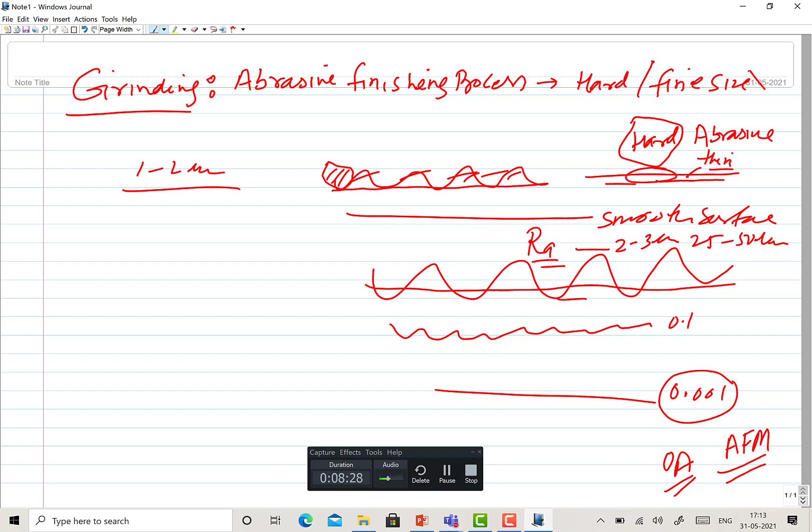So for most functional applications, we need different ranges of surface roughness. For most common cases, maybe 1 to 2 micrometer roughness is fine for most functionalities, but for critical applications you may need it up to 0.1. For further critical and higher applications, you may need 0.01 micrometer, right? So these need to be realized.

Because simple manufacturing processes like casting, welding, machining or forming will be giving you higher levels of roughness. You can get the desired size, you can get the desired shape, but not exactly the finish you want in one go through these processes. Also, not very controlled dimensions through these processes. So if you don't have very close control over the dimensions, if you have not realized a very good surface finish, then you need a secondary processing, you need further processing.

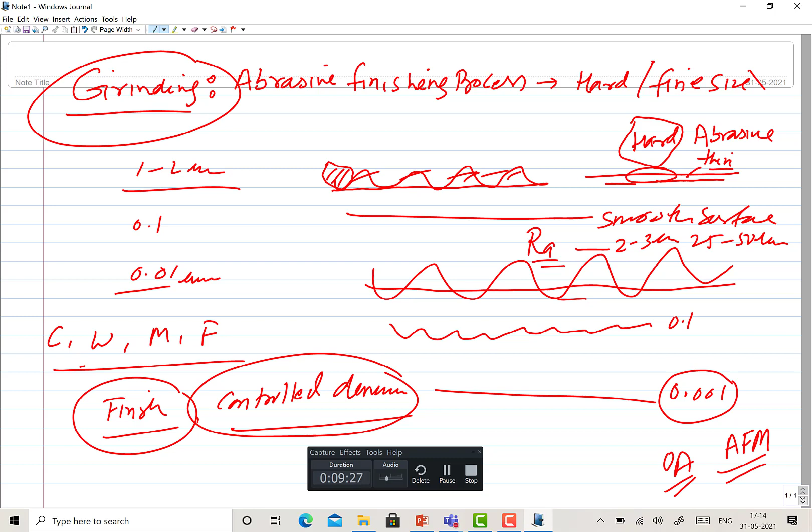So that comes in form of grinding. So primarily the grinding helps in two ways.

This is like realizing the desired surface finish.

The second aspect is realizing the desired control over dimensions. Earlier you had a variation of plus minus 0.1 - this may not be good enough for a given application. If you want a control of plus minus 0.001, you need some other process. Grinding may be able to help realize this, but simple machining may only give you say 10 plus minus 0.1. So close control over dimensions can be realized through grinding, and the desired surface finish can be realized too.

A common application you might have experienced: steel that is very polished, smooth finished. You can use that as a mirror - you can see your face on the surface of the metal because of the very high reflection realized when the surface finish is extremely good.

Okay, so now I'll show you - here if you see sand casting, the kind of tolerance, the variation in dimensions realized through casting, it is in this range.

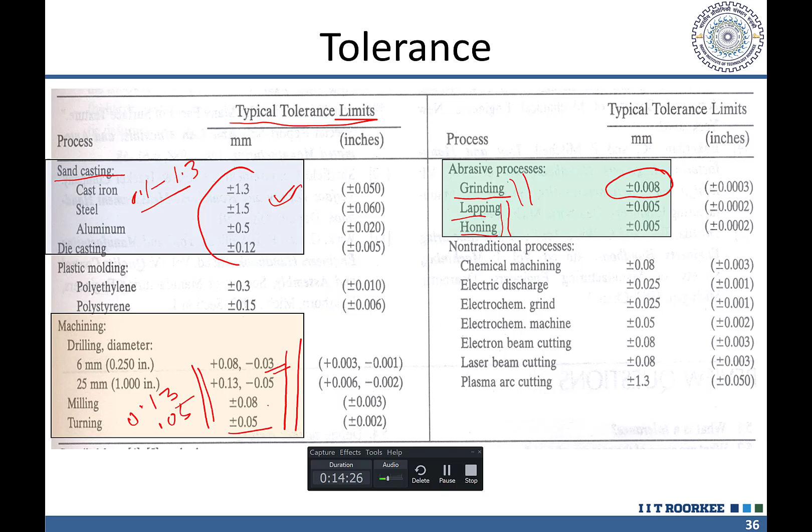Lapping and honing - you must have seen people use this for cleaning or smoothing the floor. That is the kind of lapping process where there is a fluid, abrasive, and some grinding wheel or abrasive wheel continuously rubbing in the slurry. So there is a slurry and an abrasive tool running on the floor, just to smoothen and achieve good smoothness. That is one similar example - lapping is mostly used in case of metals.

Unconventional or non-traditional processes offer a higher tolerance value.

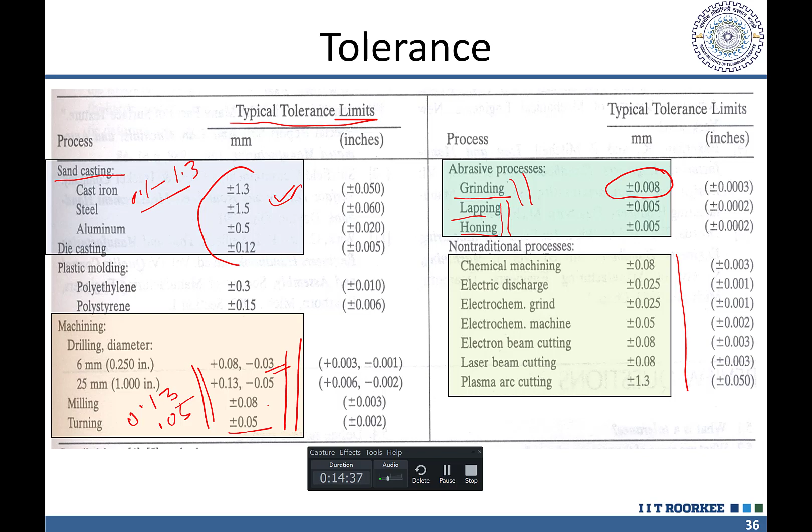Now look at the surface roughness - for casting it is high. For die casting it is reasonably good, like 1 to 2 micrometer, but for sand casting it is very high - you can see 12 to 25, even furthermore, it can be even 50 in some cases.

In metal forming, again it is high. Hot rolling results in very poor roughness - why? Because surface oxides are formed at the surface, and the surface is extremely soft, leading to a lot of indents, depressions, ups and downs, etc.

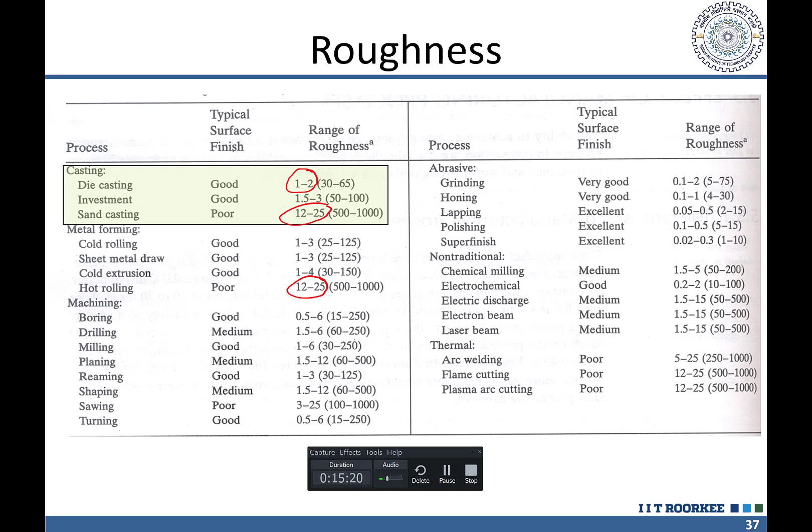But in the cold condition it is reasonably good, not that great, but reasonably good, like 1 to 4 micrometer. For machining though, it is finer, not extremely fine, like 1 to 0.5 to say 4 or 5 micrometer, depending upon the process being used. But for grinding, the surface roughness, you see, is extremely good.

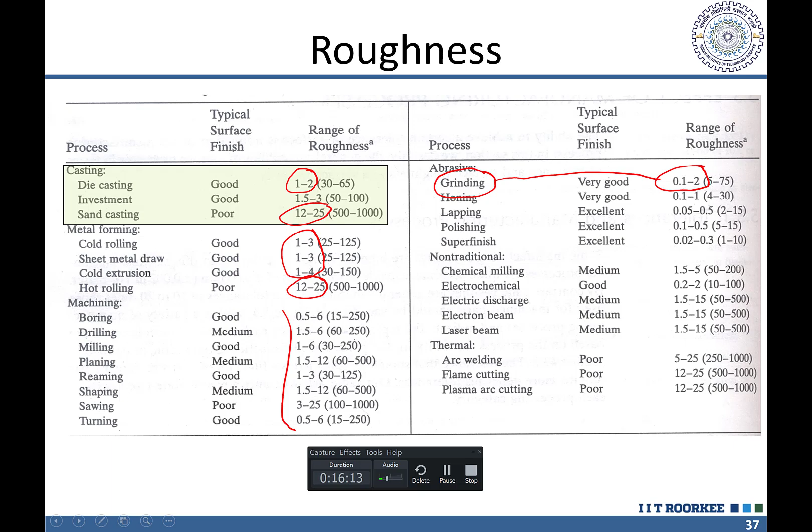Even further, even lower surface roughness can be realized if we control the depth of cut and the surface finish, and use proper abrasives of the desired size for grinding purpose, then we can realize further finer surface finishes. So these are the two things justifying where grinding should be used.

Okay, close control over the dimensions and achieving the desired surface finish, where grinding will be suitable. So the common purpose for which grinding is used - as I said, the abrasive in grinding is a key factor. For removing material, you must have seen so far in machining that the tool must be harder than the workpiece in order to indent and then subsequently remove the material.

So what are the typical characteristics of the abrasive? It must be harder - hardness of a typical abrasive, say aluminum oxide, is maybe 1800 to 2000 HV. Then SiC around 2000 to 2200 HV, Vickers hardness. This is CBN, cubic boron nitride, maybe 3000 to 3500 HV. Then further greater than 4000 to 5000 HV for diamond - PCD, polycrystalline diamond, which is used for machining purposes.

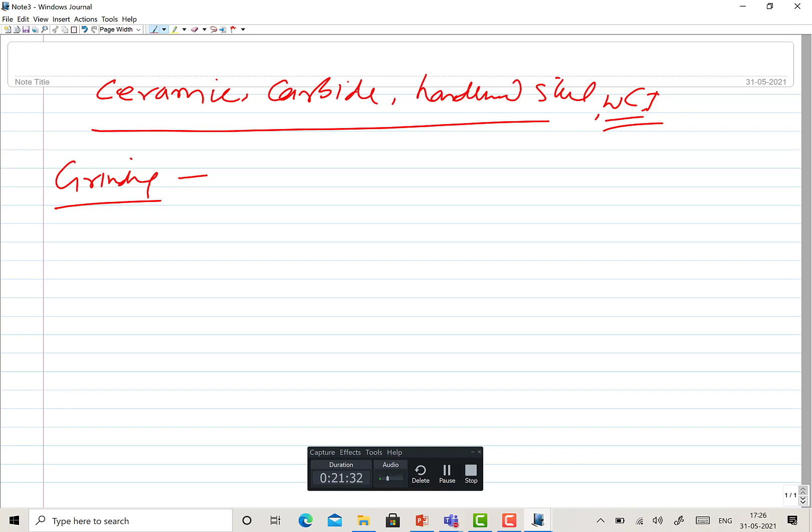So what you need is a grinder. Grinding helps to get the desired size, shape, finish of these hardened or difficult-to-cut materials. So not just the finishing and close control over dimensions is realized with the help of grinding, but it is also used for shaping purposes or for cutting purposes, especially when you find that it is not doable by conventional methods.

You cannot cut using the conventional method. So ceramics, carbides, hardened steels - these can be processed, can be cut using grinding wheels. So hard and brittle materials - ceramics, hardened steels, cast irons - these are the kind of materials which are preferred to be processed by grinding.

Now, other materials - there may be the purpose of grinding just to give the desired surface finish and desired control over the dimensions, meaning controlling the tolerance. In those cases, irrespective of the material, we can choose the suitable grinding wheel and apply grinding to get the desired finish and control over dimensions. But shaping and cutting is primarily applied in cases where material is extremely hard and difficult to process using other routes.

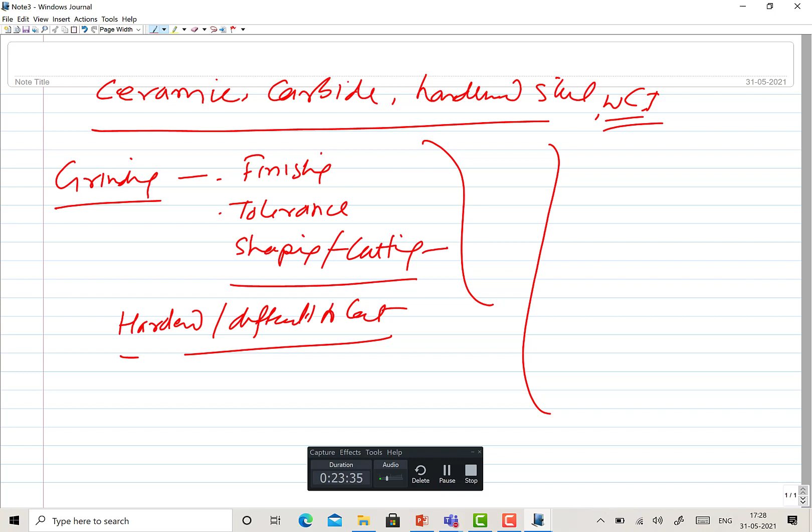So hard and difficult-to-cut materials can also be processed using grinding. Now coming to the typical, most common applications of grinding - it is used for finishing crankshafts, which are used in automobiles.

And automobiles also use lots of gears, so finishing of the gears. These are just two extremely common examples of grinding. Now grinding can also be used if, say, you have produced something and it has some irregularities, you have deposited a weld bead and it is rough, so you can use the handheld grinder. That's called rough grinding. So a handheld grinder can simply be used to remove all that unwanted material very easily without putting the entire workpiece

on the machine for machining, because sometimes hardened materials are not that easy to process through conventional machining, so they are simply removed through grinding. So in that way we can call it rough or fine grinding. Rough grinding is used just like a handheld grinder is rubbed against the surface of the component which is to be smoothened, and fine grinding is certainly performed using robust, heavy, sturdy machines. Okay, so this is about the typical applications.

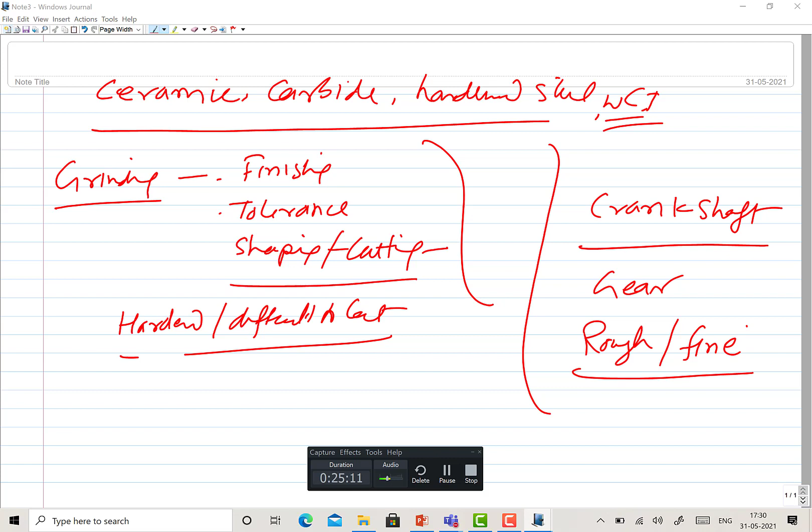Now how it is realized, I have got a few diagrams also, I'll show that. But before showing that, let me talk a little bit about abrasive finishing or abrasive machining, where abrasives can be held in different forms. Abrasive is the key actually. These abrasives can be fitted or bonded in the form of a belt or emery paper. In emery paper you must have seen alumina, Al2O3, or silicon carbide based emery papers, and emery is basically alumina based. For simple rubbing, removing rust and smoothening the surfaces, emery papers are used, where abrasives are bonded on the surface of the paper, right?

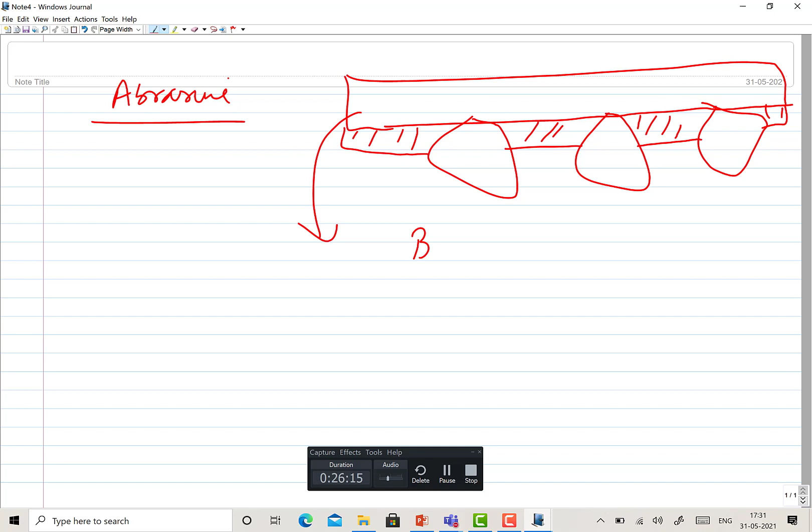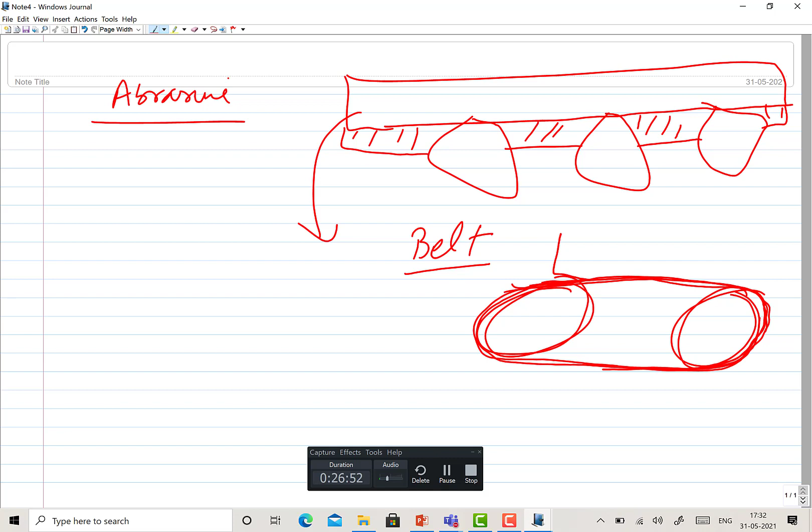Similarly, these can also be bonded in the form of papers, which can be rolled and shaped in the form of a belt. So you have rollers like this, and between these two rollers you put the emery paper or the belt on which the abrasives have been bonded. With emery paper, you take it and rub against the surface manually. Here the rollers, over which the belt fitted with the abrasives is fitted, are moved. So by hand we press the workpiece over this belt, and these fine abrasives will be rubbing the workpiece.

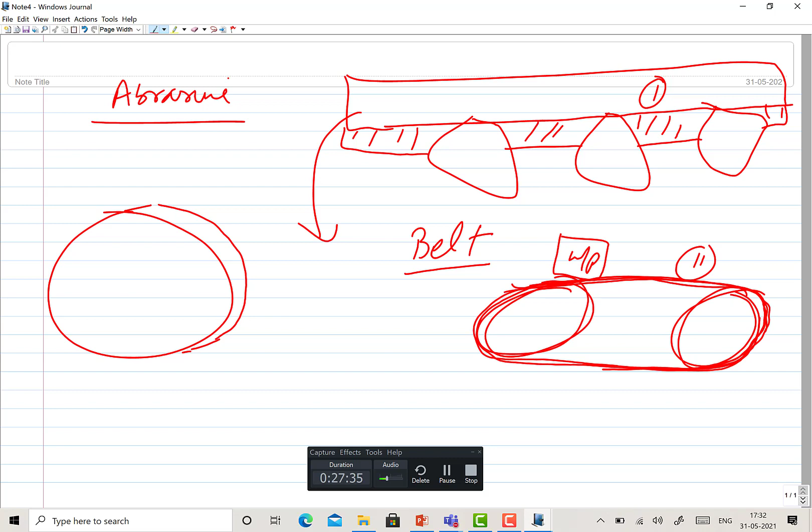So how will these be rubbing and removing the material? So these are the two forms. This is the first form, where abrasives are bonded and applied on the paper, and this is the second, where they are applied in the form of a belt. And the third, which is most common, is abrasives bonded in the form of a wheel. So the entire wheel is made of two things: one is the bonding material, and the other is the abrasive material.

The bonding material may be rubber, it may be metal, or it may be vitrified bonds. There are different types of bonds basically. So the bonding material and the abrasives are both mixed, and then they are compacted and shaped in the form of a wheel. The wheels also can be of different shapes, depending upon the shape of the component. I'll show you the different shapes of grinding wheels. So depending upon the shape of the workpiece, we can use different shapes of grinding wheel. So the abrasive and the bond are both mixed, and then they are compacted to give the desired shape.

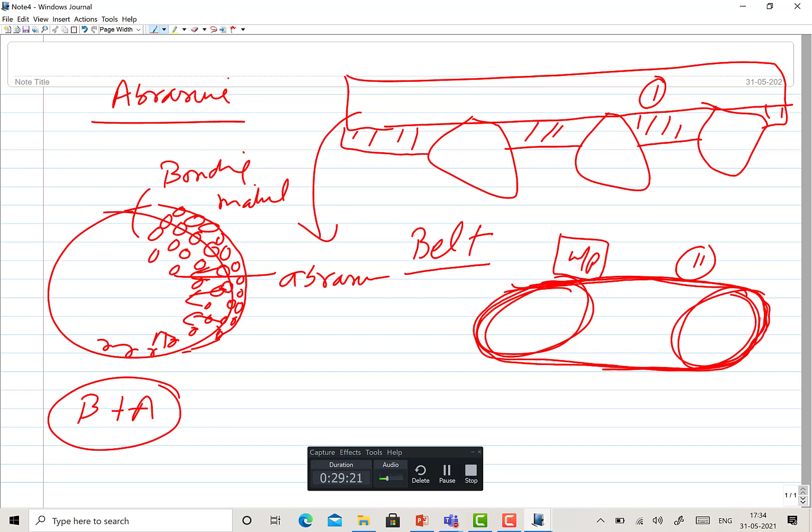When this shape is given, you will notice that abrasives are spread and distributed everywhere in the wheel. Some of these will be projecting from the surface of the wheel like this. The abrasives are present not just at the surface but in the inside zone also, fitted in the bonding material. So obviously during grinding, some of these abrasives will be damaged and removed. Bonding material will also be damaged and removed. The abrasives getting damaged means they will wear out gradually, so their shape will keep changing, and when they wear out completely, the cuttability or grindability of the abrasive particles will decrease.

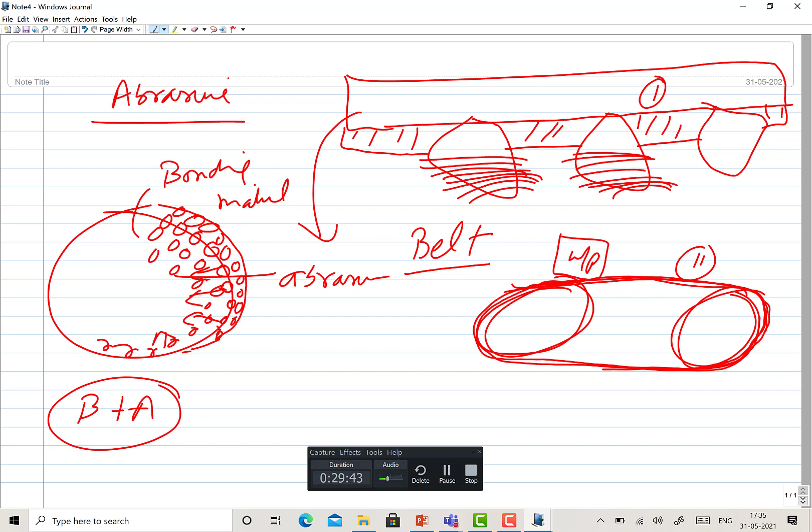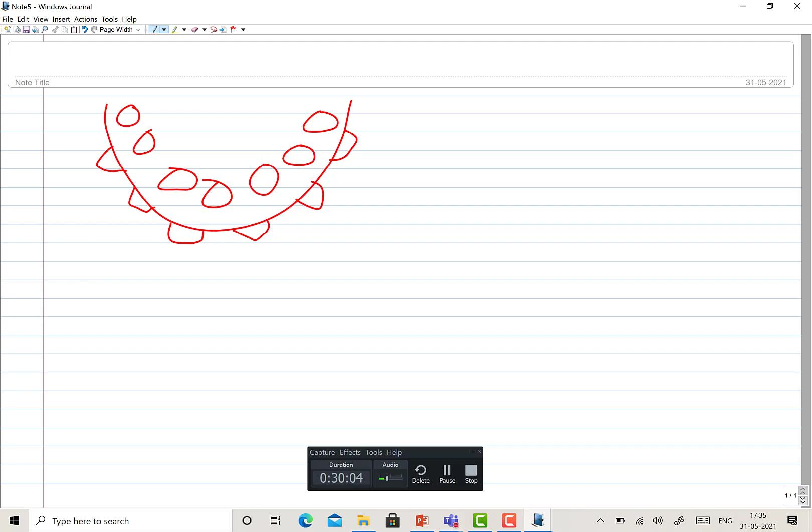So let me show you another one. Let's say this is the surface of the grinding wheel, and these are the grinding abrasives projecting from the surface. There will be a number of abrasives inside the wheel, and some of these are projected. When you continue the grinding for a while, these will wear out gradually. So eventually you will have a situation where the abrasives are not actually projecting from the surface.

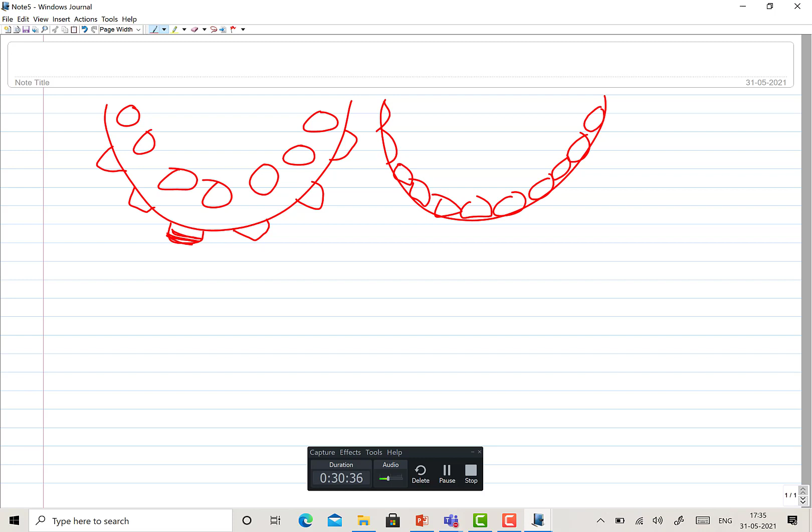So the cuttability or grindability of the grinding wheel will be reduced significantly, because you don't have the teeth to cut the material now. This you can call attrition. Attrition is nothing but a gradual wear.

So what is the reason behind the gradual wear? About that probably we'll talk a little later, but it is important to see that when the hard abrasives are interacting with the workpiece materials, the abrasives themselves will be wearing out gradually, and they will be losing their dimensions; their shape will be changed, their size will be changed, and eventually you will find that no abrasive is projecting beyond the surface of the wheel. So their grindability will be reduced.

That's one thing only. Okay, so let me say something about how the cutting happens. Say this is the surface and this is the grinding wheel, like this. So you are pressing the wheel on the surface, or moving the workpiece in the upward direction. So there is an in-feed kind of thing which is facilitating the interaction of the abrasive and the workpiece.

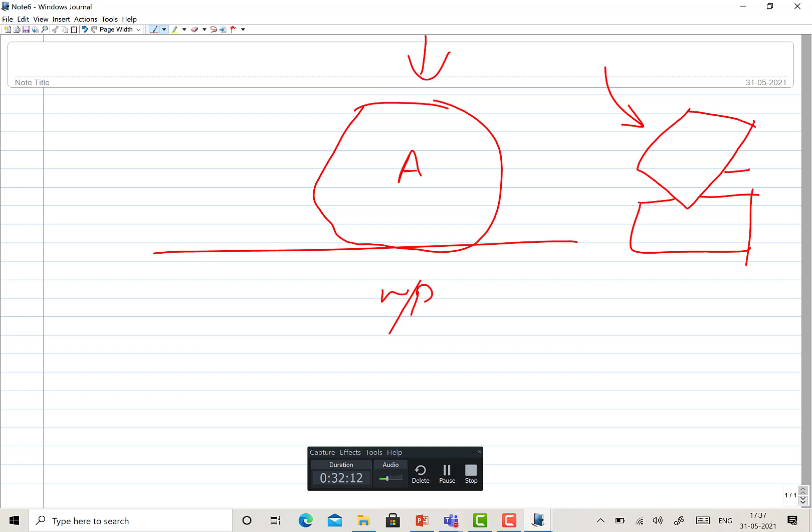Initially it is expected that the abrasive like this will indent the workpiece, like this. And then when this indent is coming down and moving and interacting with the workpiece, say it is moving in this direction, it will be causing some kind of deformation here. So when this deformation exceeds a certain limit, this material gets sheared off.

So if you see the kind of movement which exists: the wheel abrasive is moving in this direction, the workpiece is, say, fixed. So material from this zone will be removed by simply shearing action. But there is a possibility that the other abrasives which are not that sharp, or the bonding material which is not performing any cutting, will also be rubbing the surface of the workpiece.

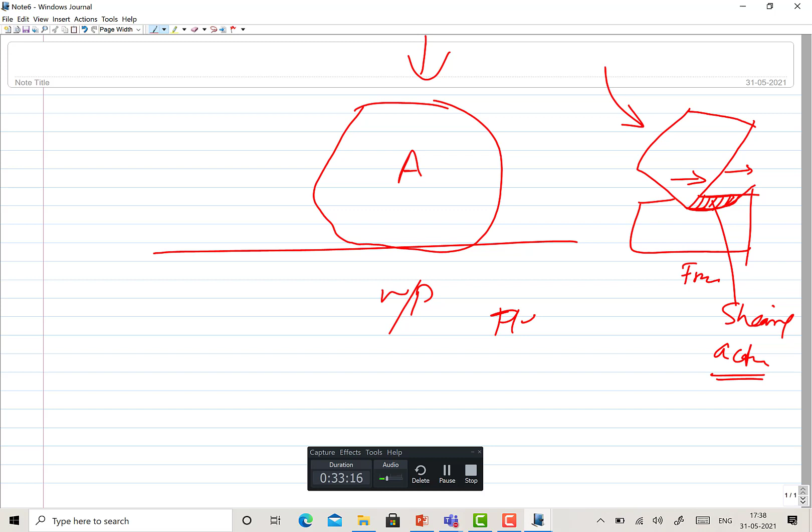So whatever mechanical energy is being used for the grinding process, a part of that will be converted into heat. So basically the first thing is the material is getting removed through shearing. And the blunted abrasives as well as the bonding material will also be rubbing the surface of the workpiece, causing friction.

So these are the two things: removal of the material from the surface of the workpiece by the fine abrasives in the form of very thin chips, or a thin layer of material getting removed by the shearing action, that is one; and the rubbing between the workpiece and the blunted abrasives and the bonding material, causing friction. So the shearing and the friction, these two are responsible for generation of a significant amount of heat.

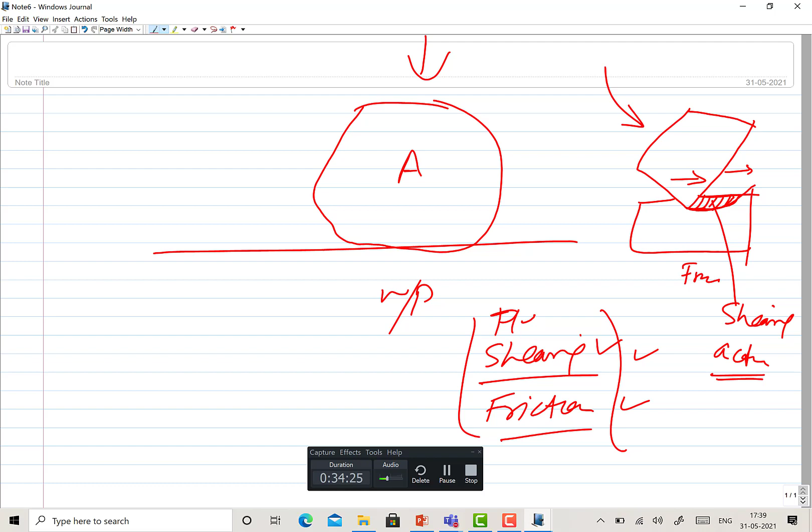So whenever grinding is performed at extremely high speed, say this is a wheel rotating at 2000 to 3000 rpm, revolutions per minute, it is interacting with the workpiece where the abrasives are fitted here and there. Some of these abrasives are removing the material in the form of fine chips, while others are simply rubbing. So this will be causing a significant rise in temperature, causing heat generation.

So heat generation is happening due to shearing, because whenever mechanical energy is applied, a part of the energy will be converted into heat, and then frictional heating. So these are the two main things. The rise in temperature is so fast, say within 10 to 20 milliseconds, it will be rising like this. Temperature will be going to maybe 300, 400, depending upon the metal being processed, the amount of friction and the kind of shearing taking place.

So with a fresh grinding wheel, frictional effects will be less, and maybe the temperature rise will be less, but if the wheel has been used for long, there will be a lot of frictional heat generation that will be causing a significant rise in temperature.

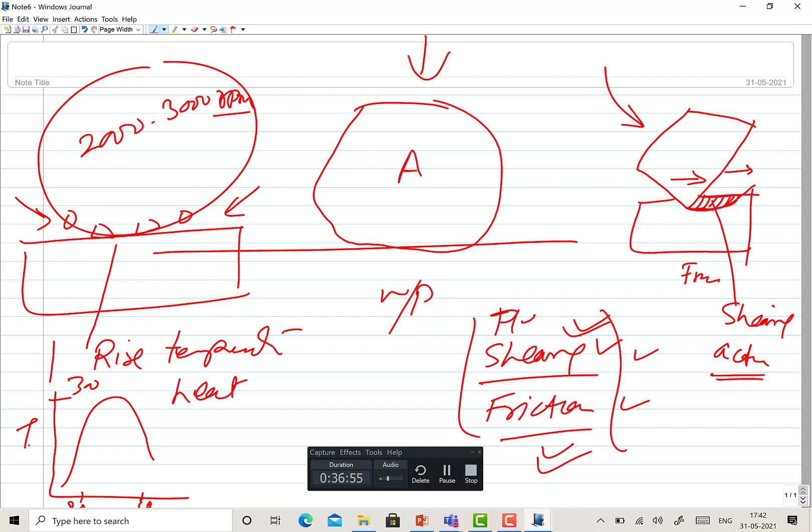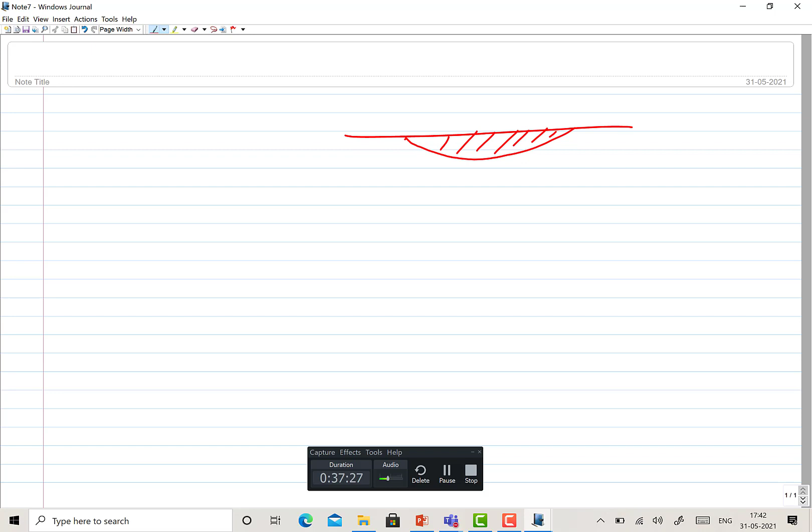This is one thing. Let's say this is the surface, and this is the zone from where material has been removed. When the material is removed by the shearing action, you will always see that the deformation has exceeded the fracture limit, where the ultimate shear stress level has been crossed. That's why the shearing has happened. But below that, this region would have been subjected to first elastic deformation, then plastic deformation, and then subsequently removal through the shearing.

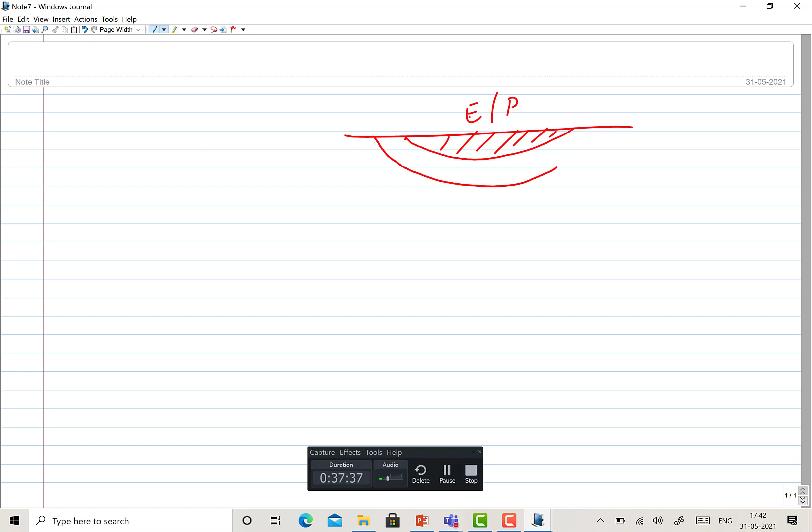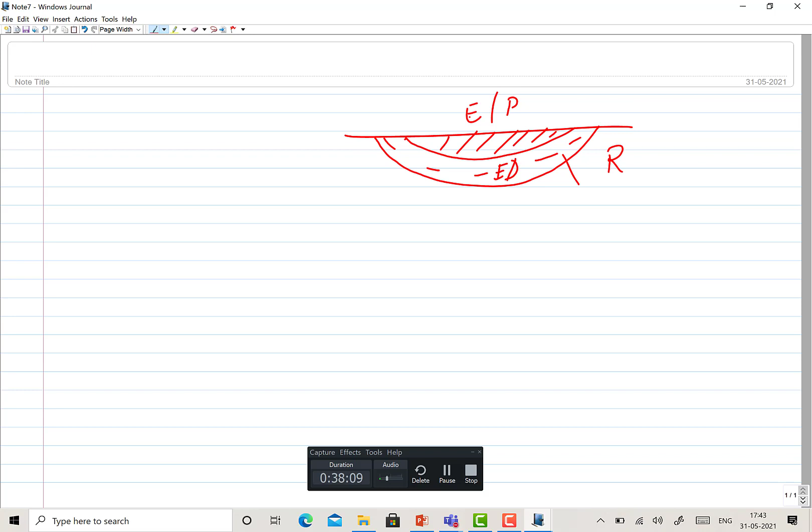But there will be a region below that which will be under elastic deformation only. The surface layer has been removed, and below that you had the elastically deformed zone, so that will try to shrink because it has been elongated in the process of grinding. These efforts to shrink will lead to the development of residual tensile stresses, meaning the surface will tend to shrink.

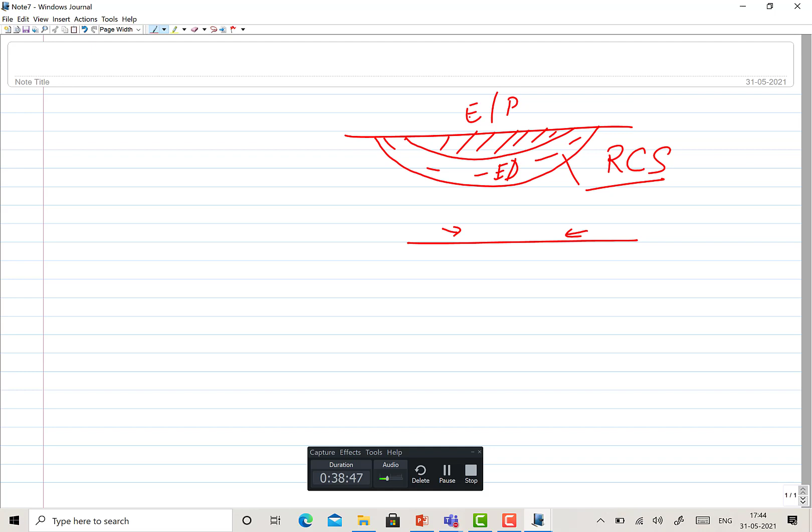The presence of the elastically deformed layer is contributing towards the development of the residual compressive stresses. These compressive stresses are there even when there are no external tensile stresses, no external load. So this is one aspect. The second is a rise in temperature.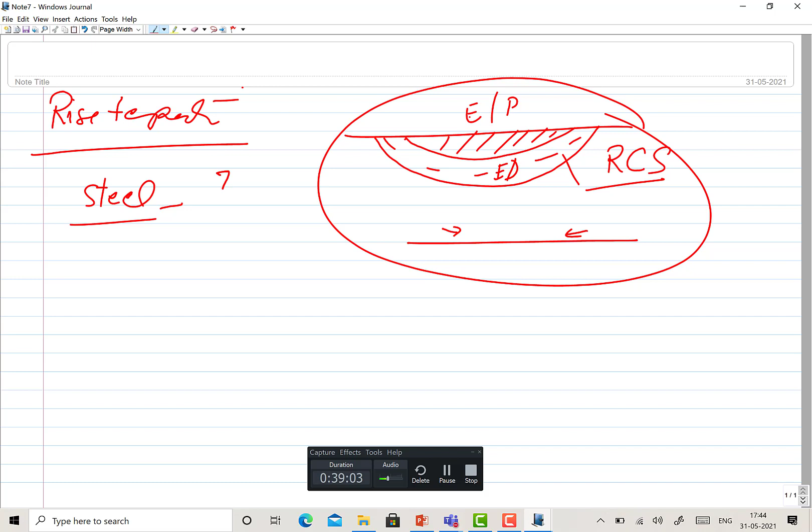As I said, in certain metals the rise in temperature is too high. Say you are working with steel, and your temperature is going beyond 700 or 800 degrees centigrade, the steel gets transformed into austenite, and due to the rapid cooling it forms the hard and brittle martensite. Formation of hard and brittle martensite at the surface sometimes promotes cracking and formation of hard and brittle layers.

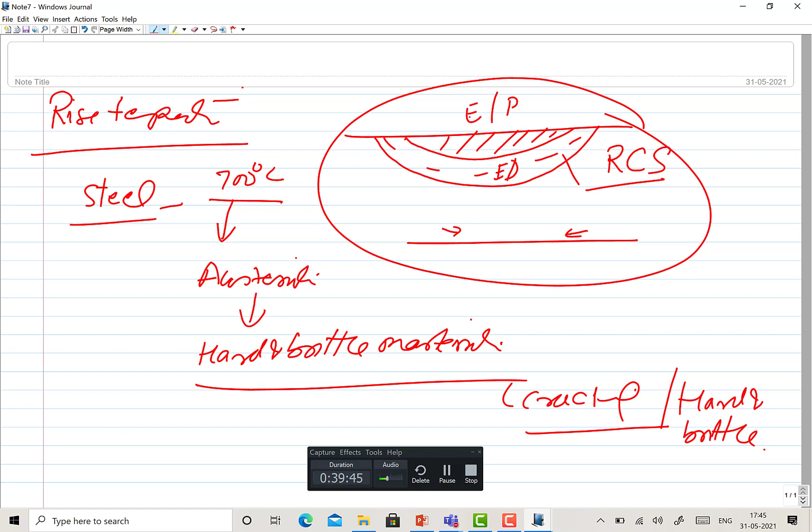So excessive heating of steel is undesirable. Maybe it is undesirable in most cases, but this is a typical example of steel, where if it is heated more than say 700 or 730 degrees centigrade, it leads to austenitization, and subsequently rapid cooling leads to martensite formation, which in turn promotes cracking and embrittlement. Similarly, in quenched and tempered steel, heating causes over tempering, leading to softening of the surface. So there is always alteration in properties due to overheating.

Earlier you had one set of properties before grinding, and after grinding you find that its properties have been modified. Its hardness has increased or it has softened. Over tempering leads to softening, and martensitic transformation leads to embrittlement. It depends on the condition of the steel. If the steel is in quenched and tempered condition, it will lead to softening, and if it is plain carbon steel in normalized or annealed condition,

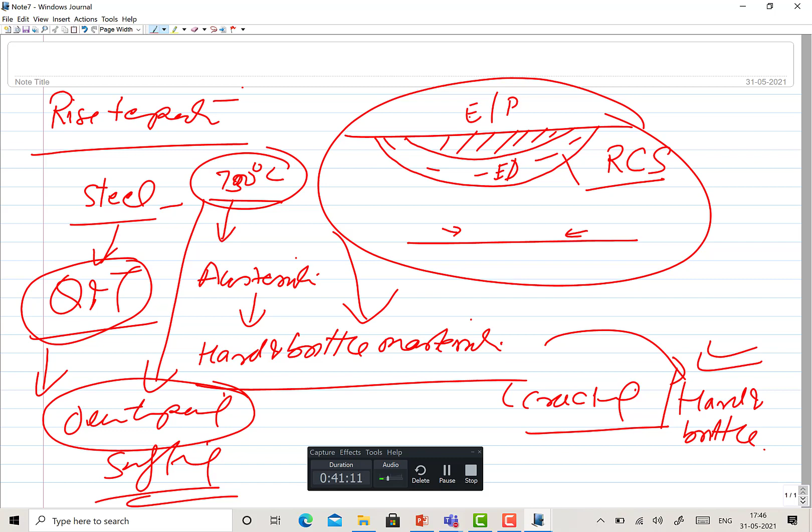then it will lead to hardening and embrittlement. So a rise in temperature is not good in any case, and that's why we need cooling. We need to control the temperature, and that's why very frequently during grinding we use coolants. Now let me show you a few.

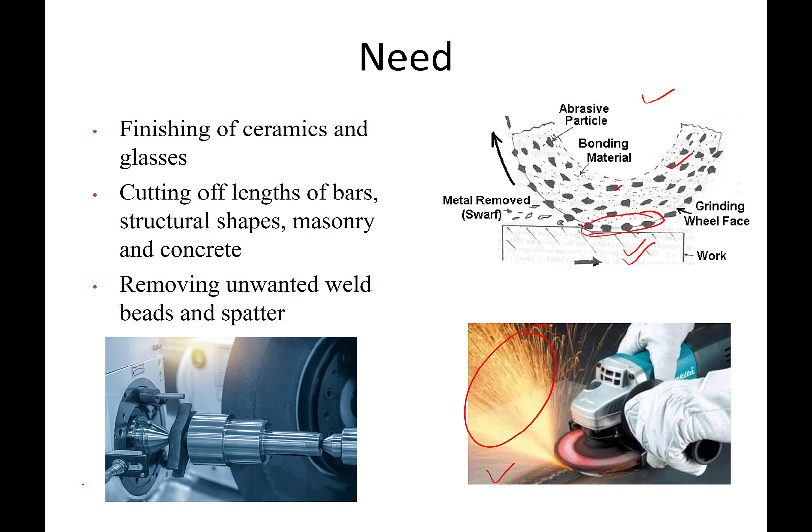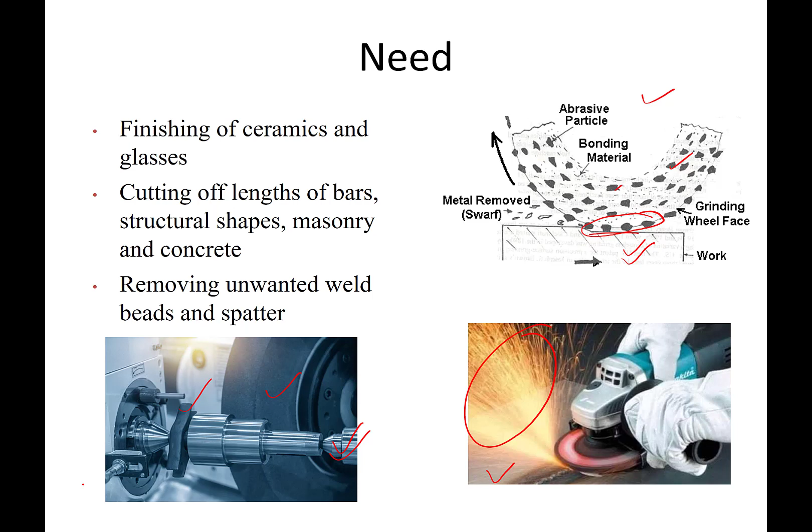This is what I was talking about as far as the approach of the grinding is concerned. These abrasives will be interacting. Let's say this is the direction of the grinding wheel rotation, and this is the abrasive which is interacting. When it interacts, you will always find that this is the zone from where material has been removed, and this is the chip which is being removed.

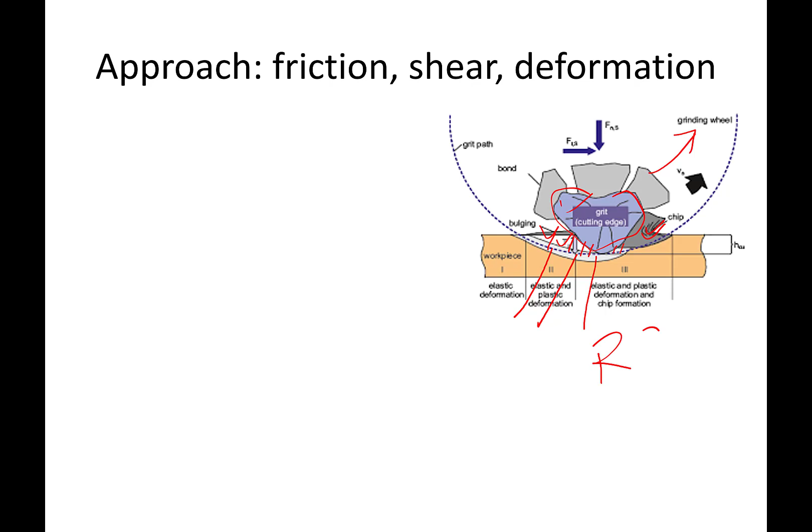So here you see, this is the zone which would have been subjected first to elastic deformation, then plastic deformation, and then finally shearing off. But below that there is a zone which will be under elastic deformation. This zone of elastic deformation in turn causes residual compressive stresses. These are good for the tensile strength and the fatigue behavior of the material.

As far as the heat generation is concerned, I talked about two things primarily. One is shearing, where a lot of effort is needed to remove the material from the workpiece by the abrasives, so it consumes a lot of energy, and part of that energy is converted into heat. The rest is friction, like rake friction or flank friction.

So say this is the abrasive; this you may term the flank part of the abrasive or the rake part of the abrasive, if the abrasive is moving in this direction. So there may be friction between the rake face and the workpiece, the flank face, and the chips. So basically friction and shearing are the two main causes behind the rise in temperature, and the rise in temperature is extremely fast, and it depends again on the kind of abrasives being used.

CBN, cubic boron nitride, because of its good conductivity, leads to a somewhat lesser rise in temperature as compared to alumina. Alumina has lower thermal conductivity. And you can see the effect of depth of cut, although it is in micrometers, not in mm like what you have seen earlier, half mm or 1 mm depth of cut.

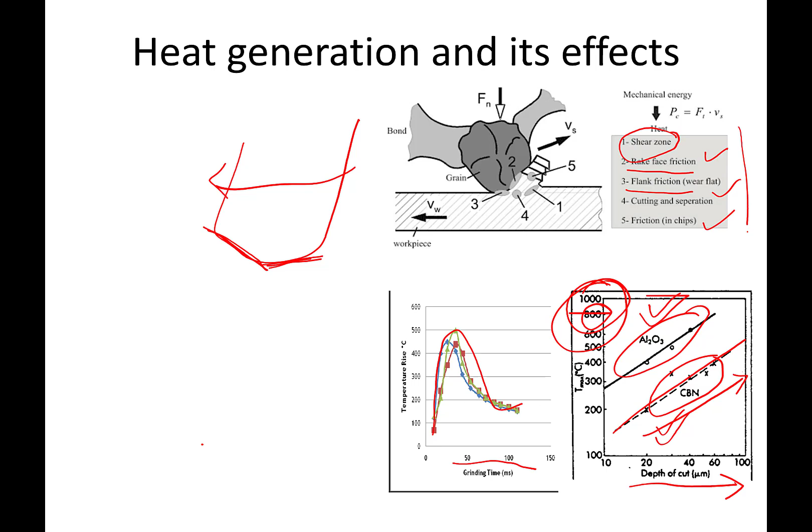In the front view, say this is the wheel, and this is the workpiece. The wheel is rotating, and this is the workpiece. So if you see here, when the wheel rotates, the surface will be interacting with the workpiece here. So you have to move the grinding wheel all along the surface of the workpiece to be smoothened like this.

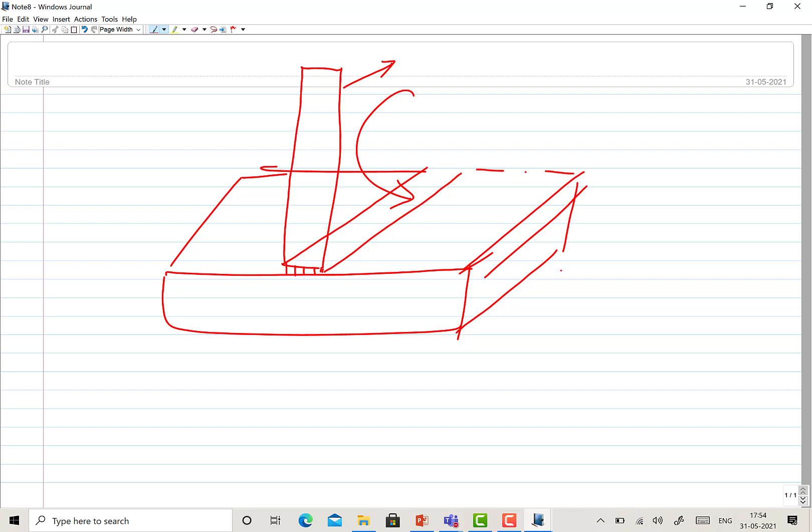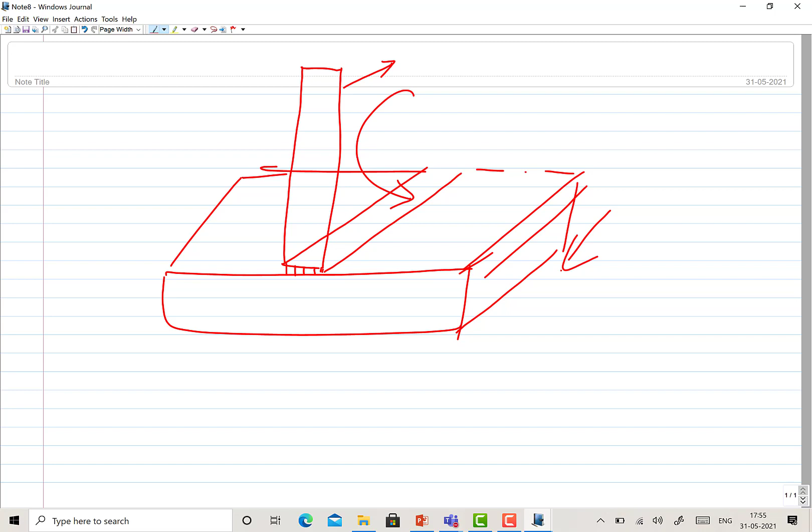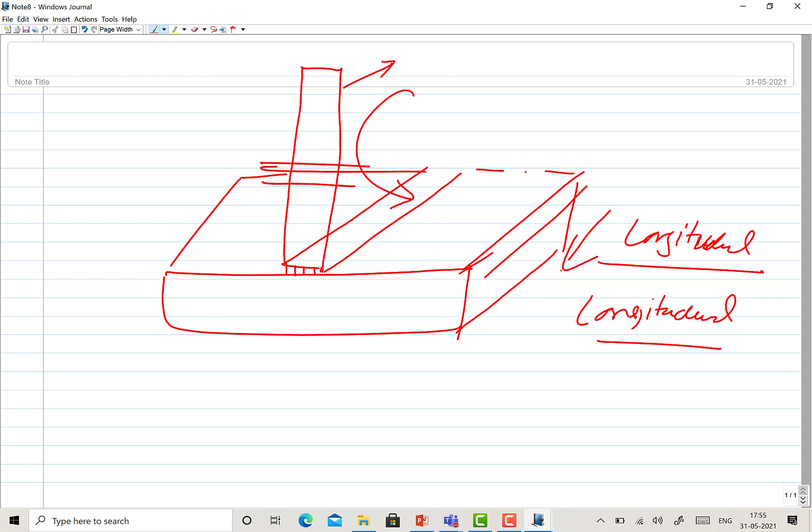So either move the grinding wheel or move the workpiece. Usually the grinding wheel is kept fixed and the workpiece is moved. This movement perpendicular to the axis of the rotating grinding wheel is called the longitudinal feed. And to cover the entire surface area, you need to do the lateral movement. That lateral movement is given to the grinding wheel, and that is called cross feed.

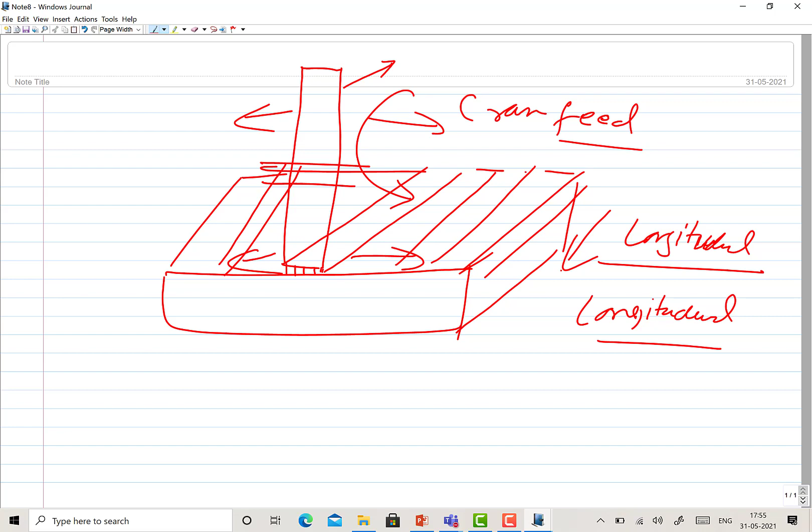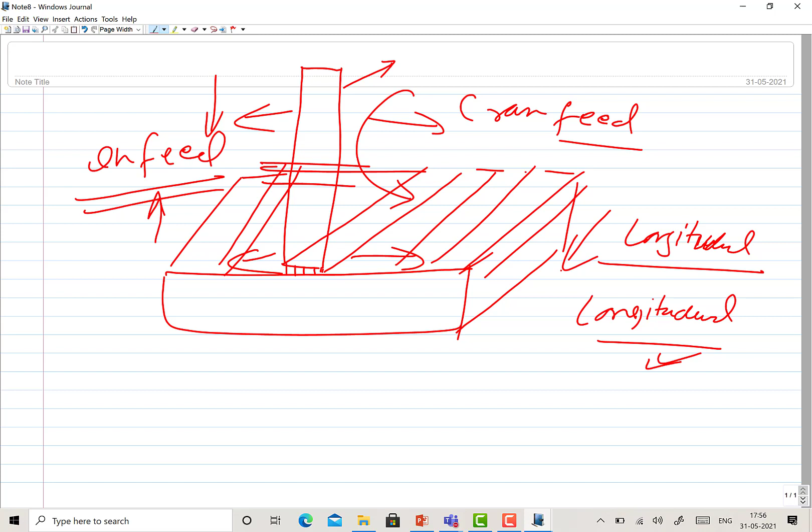So to cover the entire surface area, cross feed is given, and to cover the given length of the workpiece, the workpiece is moved past or through the grinding wheel; that is called longitudinal feed. And in order to give the depth of cut, either the workpiece is moved up or the wheel is moved down. This is called in feed. So there are three feed related terms. Feed means we are trying to bring the workpiece and the tool into interaction with each other.

The longitudinal feed helps to move the workpiece past or through the grinding wheel. The surface area is covered by the grinding wheel through the cross feed, and in feed determines the depth of cut, how close the two are coming. So the DOC, depth of cut, is identified through the in feed.

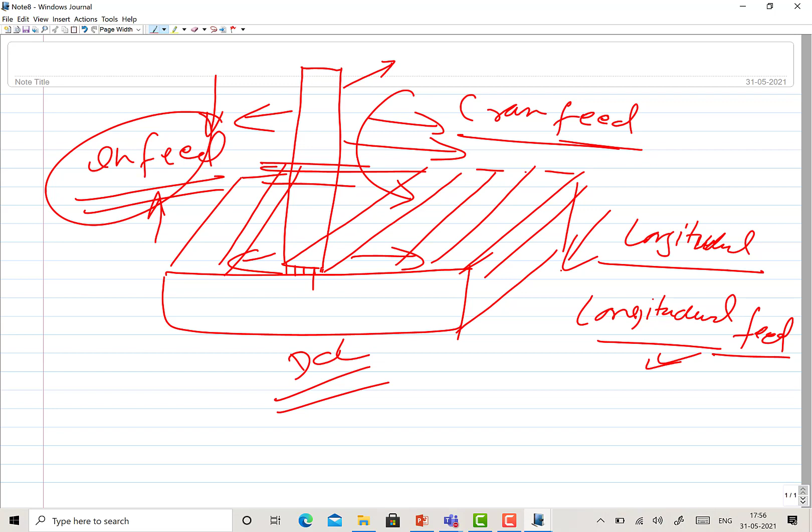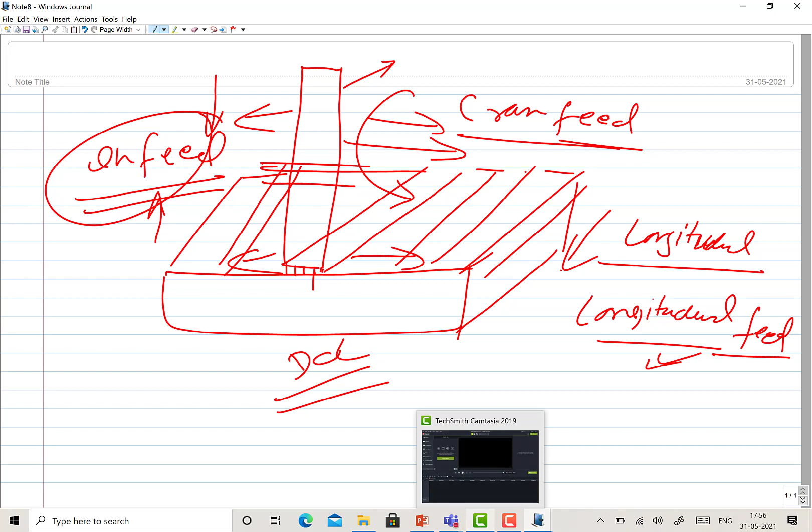In different configurations, there can be different ways to realize the depth of cut as well as cover the entire surface area. This is a simple case of surface grinding. There can be cylindrical grinding, there may be internal grinding. There are different possibilities. So this is a case of surface grinding only.